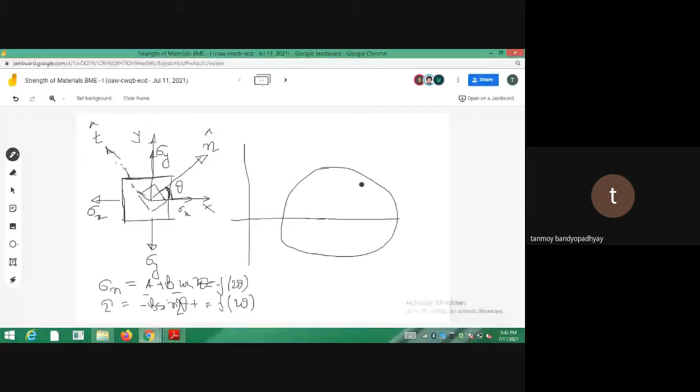So now when I am drawing this, the initial question that you asked is: if I now plot 2 points on this equation of the circle, any point lying on it must satisfy the equation we got, which was sigma n minus sigma average whole square plus tau square equals r square. So this is the equation of the circle.

If you see in the equation of the circle, 2theta terms always appear. So whenever you want to represent something on the Mohr circle, you have to plot the angle as 2theta. The actual inclination with the x-axis is theta, but whenever plotting on the Mohr circle, that will actually be 2theta. So as per your question, these are the 2 points, P1 and P2, and similarly on the vertical line I will be having 2 points.

This is actually, say, suppose Qn, Q1, Q2. So P1, P2 points actually, you can see they are lying on the circle. So only these 2 points carry any sense. No other point on this line actually carries any sense.

So only these 2 points actually satisfy the equation of the circle. So what are these 2 points? On these 2 points, I can see that they are carrying the maximum and minimum normal stresses sigma n. So P1 and P2 will be sigma 1. P1 will be something like sigma 1, 0. P2 will be sigma 2, 0.

So this line is actually representing the principal, the inclination of the principal planes. For this case, when you have considered tau xy equal to 0, you have taken, you are trying to join actually. So what I'm trying to tell is, this x-axis actually represents the plane with

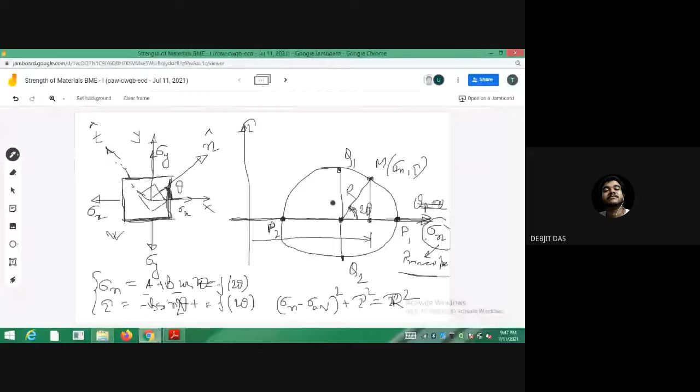So this is sigma average. So sigma average plus r cos, when there is tau, when there exists a shearing stress, that's a different case we'll be discussing today. I am just discussing the case where tau xy is absent. That's a different case that we'll be taking up today.

Yes. Okay, is this clear up to this point?

So let's now move to the next thing. As I mentioned, I think both of you who asked the questions have the same doubt. My explanation is: whenever there are two things, one is the actual inclination of the planes, and number two is the Mohr circle, don't confuse between the two.

I mean, don't take the actual inclination on the Mohr circle, because the Mohr circle is just the equation of a circle. It's a different thing from figure 1. Actually all the angles there are 2 theta, so that is why the Mohr circle always carries values of 2 theta.

And why don't I show this theta plane on the Mohr circle? Because on the Mohr circle, the sigma axis is the theta plane. Okay? On the Mohr circle you don't... the voice is breaking.

So I think you should study the figure in your books and all. So now let me move to the next part to cover.

So now let's consider. So yesterday, have you drawn the Mohr circle? I had given it as an example in the class as well.

Yes, sir. So has the values matched? Almost, sir, almost. I asked you to calculate the percentage error as well. Yes, sir, the second degree we can't... I mean, I can't find it because the graph paper is very small, the boxes are very small, so I can't.

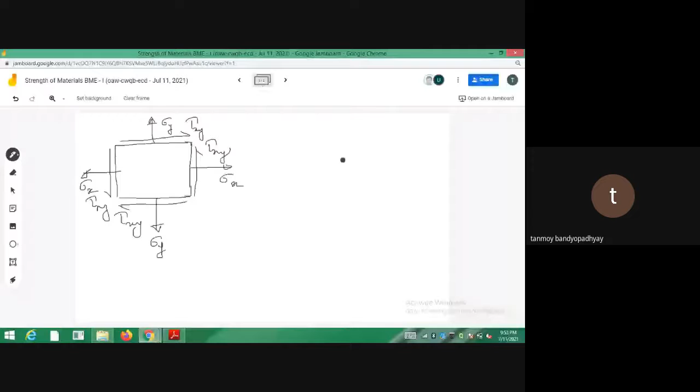Okay, so now how to draw the Mohr circle for this one? In order to draw the Mohr circle, I believe I have discussed this already. Now we have to take some convention. The convention is generally known to us. So we are having two faces. This is the convention actually.

So whenever the convention regarding the normal stress is applied, normal stress that is tensile we take as positive. Whenever it is compressive, we take it as negative. So that is the general convention.

Now regarding the shear stresses, what is the convention we have followed? Whenever about a center point the shear stresses are trying to rotate it in the clockwise direction, take it as positive, meaning plot it above the sigma axis. You can see that for this one, the tau about the center of the body, the shear stress is trying to rotate the element in the clockwise direction, so the point has been plotted above the axis. So clockwise means above, and whenever it's trying to rotate the body in the anti-clockwise direction, the point has to be plotted as negative as per our convention.

We had discussed the conventions regarding shear stresses. So whenever the shear stress is trying to rotate the body in the anti-clockwise direction, always take the point on the bottom side, bottom direction.

So let's see how the things are working for us. I am considering this face. On this face, let me call it A, B, C, D. So I am having two points. On the face AD, you can see that sigma x is actually positive. And what is the shear stress? Shear stress is tau. How is the shear stress trying to rotate this one? This shear stress and this shear stress, they are actually causing an anti-clockwise rotation, so anti-clockwise rotation means I have to take it as minus tau xy.

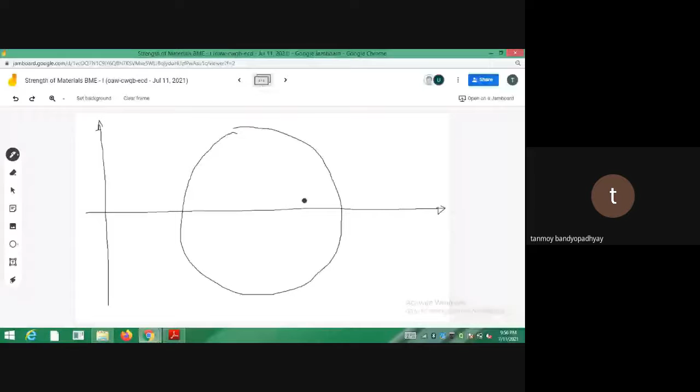So initially, what is the step? Forget the circle. Initially, you have to take 2 axes: one is sigma n and another one is tau n. Then you have to plot the 2 points sigma y and sigma x.

So I am plotting 2 points. This is one point I am plotting, this is the other point I am plotting. So this is sigma x, this is sigma y. Then what you do is you have to bisect these two.

So how to bisect these two? This point is actually sigma x comma 0. So I have given some name. This is sigma y comma 0. Then you bisect the two. So this point will be sigma average comma 0.

Now what you do is, with this as the center and this one as the radius - either this one is the radius or this one is the radius - with any one of them as the radius, you draw the circle. So now this is the point.

On this point, since sigma, the first point is sigma x minus tau xy, just plot it below the sigma n axis. So this is one point which you have to plot, actually sigma x comma minus tau xy.

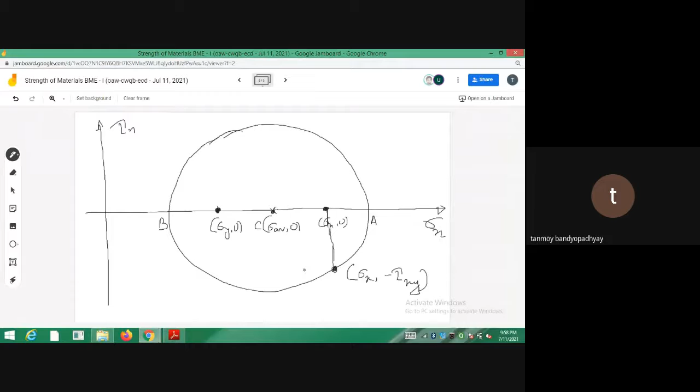Then similarly here also you plot one point. This will be on the other face, it is actually sigma y plus tau xy. Then what you do is you join these two points.

So now this angle is this one. If you can measure this one, this is sigma y, so this one will be as I last discussed. This point will be sigma 1, 0, this point will be sigma 2, 0.

So if you find out, this value will be sigma x minus sigma y by 2. And what is this length? This length is tau xy. This length is tau xy. I call it as theta p. So theta p.

So this angle is actually 2 theta p, as will be clear. This is because tan 2 theta p is equal to 2 tau xy divided by sigma x minus sigma y. So you can see that this is tau xy. So tan 2 theta p will be perpendicular by base - perpendicular length is tau xy divided by this one. So you should be getting this value. Okay, clear?

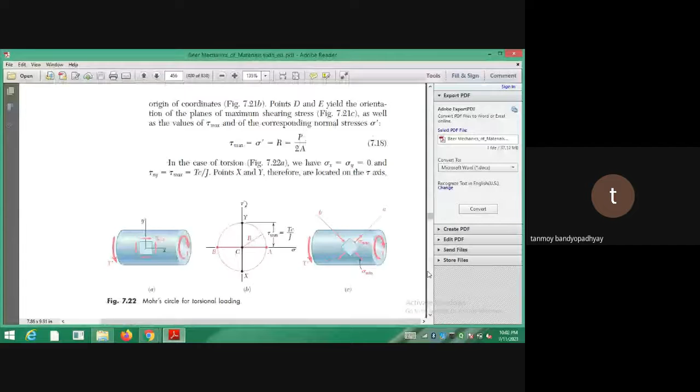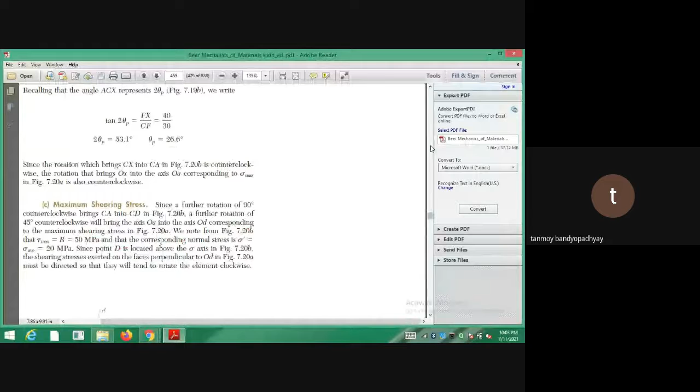Okay, so now you can see in this figure what I have done. This is the Mohr circle. For this case, this is the thing I have drawn.

Now what you have to do in order to arrive at sigma n and tau n is rotate this line xy by 2 theta in the clockwise direction. When you rotate this line, x prime, y prime may fall on any coordinate.

If 2 theta is 180 degrees, then x prime, y prime will actually coincide. Understood?

So whatever is the value of theta, you rotate this line xy by 2 theta, and you will arrive at a new line x prime, y prime. The coordinates of this new line are actually the values of sigma n and tau n. So x prime is sigma n minus tau n, and y prime is sigma n plus tau n. Understood?

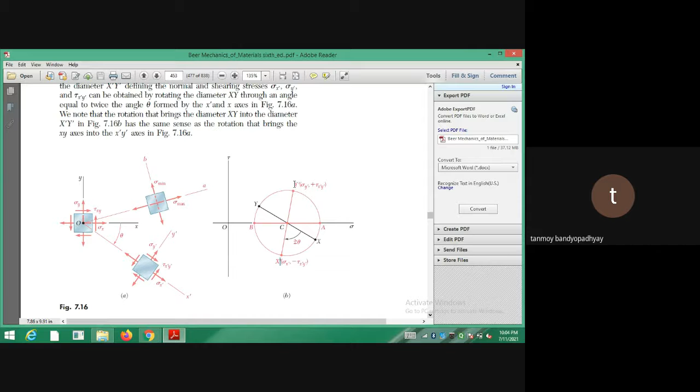So in order to obtain any point on the Mohr circle, this is the actual line xy, and then you have to rotate this xy line by 2 theta. So initially you have to get this xy line.

So this is one problem I will be giving you. On the Mohr circle that you are having, this is sigma n, and this is tau n.

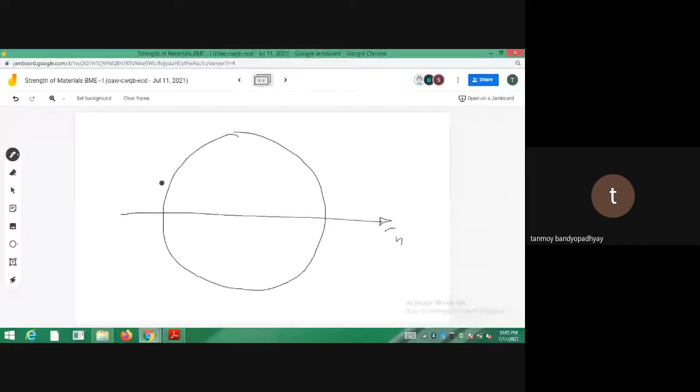So you will be getting some point x, y. I have shown you how to plot those points. So x will be having coordinates of sigma x, minus tau xy.

And this will be point y, with coordinates sigma y plus tau xy. Then this angle is actually 2 theta p.

Then whatever is the value of rotation given, suppose you are given say 30 degrees, so 2 theta is equal to 60 degrees. So you rotate this line by 60 degrees, and you'll be getting some new point.

This point will be x prime and this point will be y prime. Whatever are the coordinates of these points, these will actually be the values of sigma n and tau n. These are two complementary points separated by 180 degrees. In this way, you have to draw the Mohr circle.

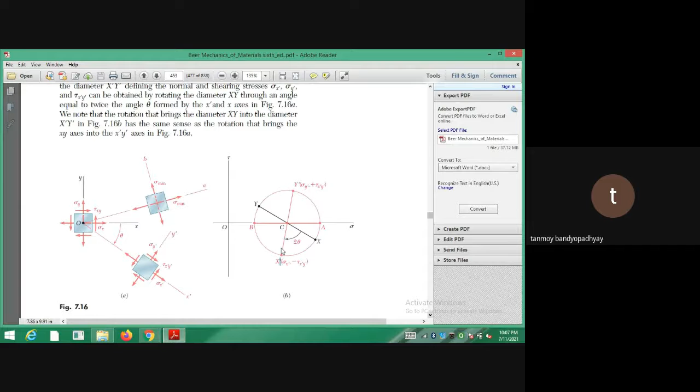So the thing you have to study is - this is given, there's a lot written here. So initially you have to find out how to plot the points x and y. The xy line is the actual line that represents the principal plane now. In the previous case, it was like AB itself, because in that case you don't have tau-xy. So AB was your principal plane line.

So from there you plotted 2 theta. But now the case has changed. In this case, not AB, but the line xy shown in the figure represents the principal plane line. So from xy, you have to draw 2 theta, so as to arrive at the new value of the stresses, sigma-n and tau. Do you understand the difference from the previous case? In the previous case, the x-axis itself was your principal plane line. But now the principal plane line has changed.

I hope I have kept the figure. Oh yes, I have kept the figure. So as I told you, for the previous case when tau-xy was absent, this x-axis itself was your theta-p line, your theta-p plane. So from the theta-p plane, you rotated it by 2 theta.

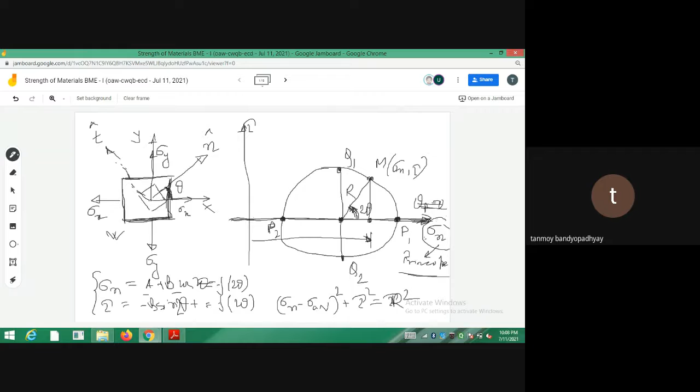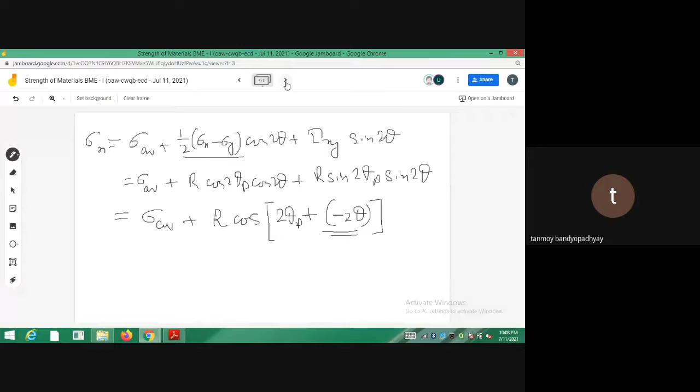Now your theta-p plane has changed, it has changed to this one. So now your theta-p plane has become this xy line. So from this xy line, you have to rotate it by 2 theta clockwise. Okay, I am writing it as clockwise. So this is very important.

Don't rotate it anti-clockwise as per convention. As per our conventions, you have to rotate it in the clockwise direction, so that this x-prime y-prime line is now the new line that represents the value of the stresses.

Can you follow up to this? Yes sir, understand - not understand, understood. Yes sir.

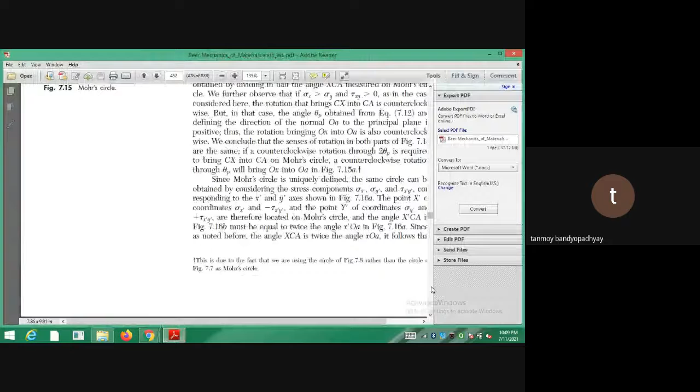Okay, I am giving you a problem to do as Mohr circle. Last day I gave you one problem, so I'm giving you a problem from the book itself, a solved problem, okay? But don't do it by this method - for construction of the Mohr circle, I'm going to do it by this method itself, sorry.

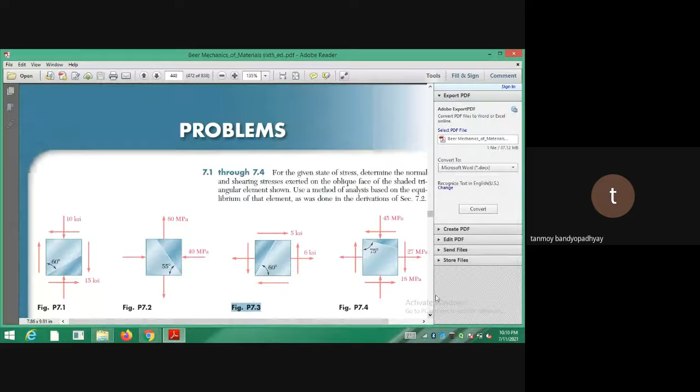It's self-explanatory. So whatever value you get from the analytical method, if it matches with the Mohr circle method, you can be rest assured that you have done the problem correctly.

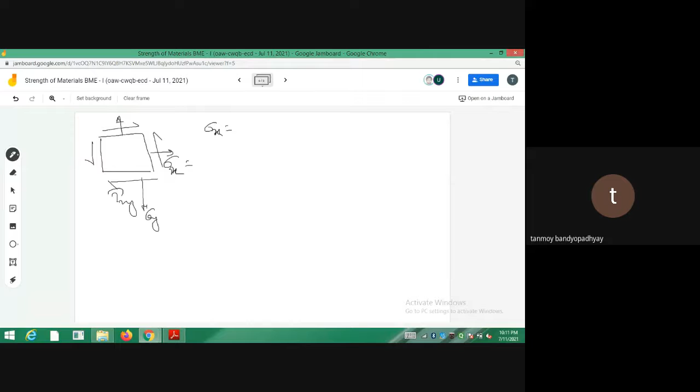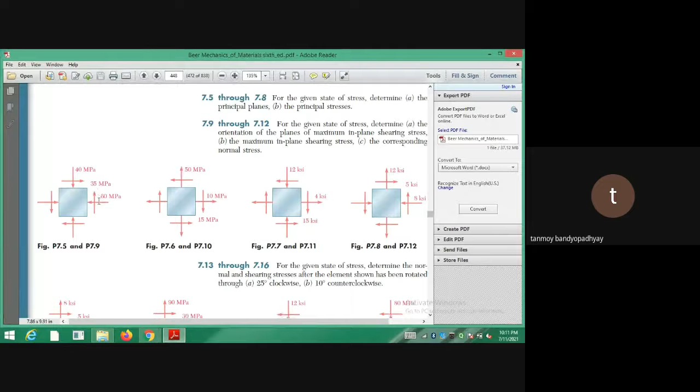সো ইনিশিয়ালি কি করতে হবে? এখানে তুমি ডাইরেক্ট প্লট করে নাও। ইউ টেক হোয়াট এভার ইজ গিভেন, ইউ প্লট দি ভ্যালুস। সো সিগমা ওয়াইটা নেগেটিভ অ্যাক্সিসে চলে যাবে। সো ইট উইল বি লাইক দিস - সিগমা এক্স দুটোই নেগেটিভ অ্যাক্সিসে চলে গেছে, এইদিকে y axis টা চলে যাবে, সো ইটস ইন দ্য সেকেন্ড কোয়াড্রান্ট।

সো ইউ প্লট সিগমা x is I think -60, 0, and then you plot one point which is -40, 0. So you are getting the 2 points. Now you bisect those 2 points, ঠিক আছে? You bisect those 2 points, so you will be getting sigma average, 0.

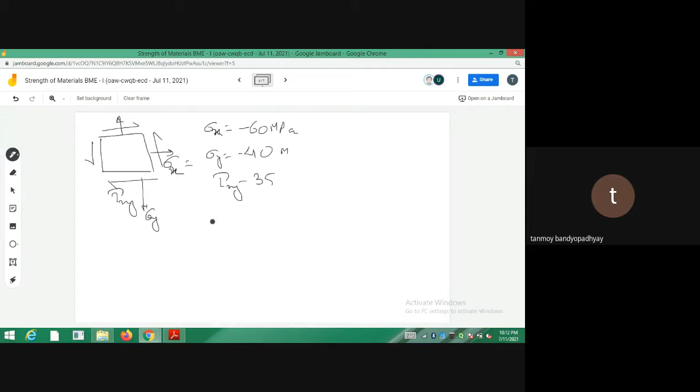Now what you do is, so what are the points that you are having actually? So initially you are having, so for a plane, for this face it is -60, tau xy, এই ফেসের জন্য it is counterclockwise, তাই তো? So negative, so -35 for one face, and for the other face it is -40, +35.

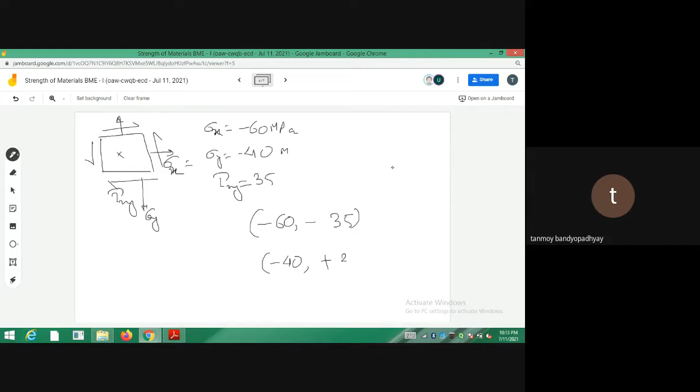So minus 60 minus 35. So minus 60 minus 35 will be 1 point you get. So this is minus 35. You come down by minus 35, and again you go up by plus 35. Then you join these points.

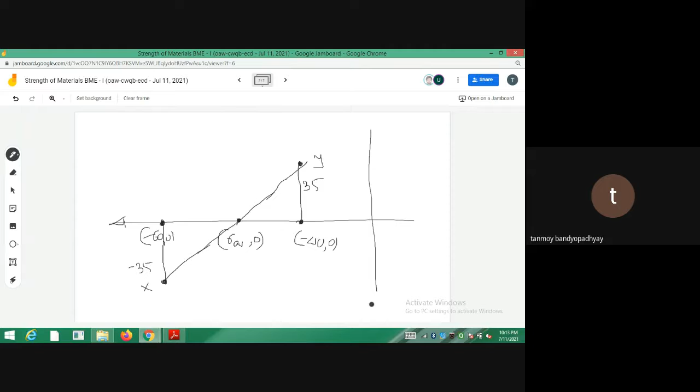Okay? So these 2 points are actually points on the circle. One is x, other is y. So take this one as radius, you complete the circle. So you'll be getting a circle sort of this thing. So circle diagram hobe, sorry for not drawing well, about to draw a circle.

Now তোমাকে কি বলেছে? আচ্ছা এবার এখানে প্লেনটা কিছু বলেছে, দেখে নিচ্ছি দাঁড়াও, 7.5। আচ্ছা यहाँ पे তোমাদের প্লেনটা বলেনি, you can take any plane. Say you take theta is equal to 30 degree, say you are supposed to find out what is theta is equal to 30 degree.

ঠিক আছে? It's easy, মানে it's beneficial because you can just match the values with the analytical answers. So not needed, the answers are not needed. So what you do is now, theta is equal to 30 degree means 2 theta is equal to 60 degree.

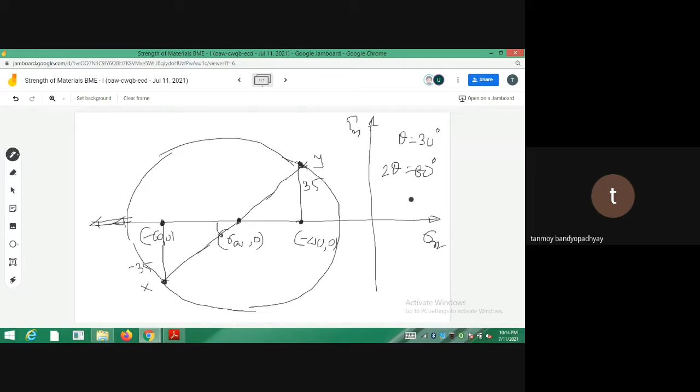So this line now you rotate clockwise, right? So this one is 2 theta p, ঠিক আছে? এইটা ছিল হচ্ছে 2 theta p. So now you rotate this by কতটা rotate করতে হবে? 60 degree, so you rotate it by 60 degree. So you'll be getting a line something like this.

So this one is the line. So this is the new line x prime, this is the new line y prime. So for x prime, just to check, this is sigma n, comma tau n. Tau n টা positive হয়ে গেছে। So now you find out what are the coordinates of this one.

So you'll be getting some value of sigma n, you'll be getting some value of tau n from the actual graph. So this is from Mohr's circle. Then you do the analytical method and find out what is sigma n and tau n. So if those two values match, you will be getting the answer.

বোঝা গেছে? এখানে অ্যাকচুয়ালি দুটোই কম্প্রেসিভ আছে বলে আই থিঙ্ক ইটস ডিফিকাল্ট, ইউ ক্যান ট্রাই দিস ওয়ান অলসো। যদি মনে হয় এটা একটু কমপ্লেক্স আছে, ইউ ক্যান ট্রাই দিস ওয়ান অলসো। হিয়ার ইউ আর হ্যাভিং লাইক দিস ওয়ান পজিটিভ। Both of them, anyone, 7.5, 7.6, anyone you can try. If you want to keep sigma x, sigma y positive, you can try 7.6, and you can try 7.5, anyone. ঠিক আছে? 7.5 এ both sigma x, sigma y are negative, so orientations একটু different হচ্ছে। ঠিক আছে? Clear?

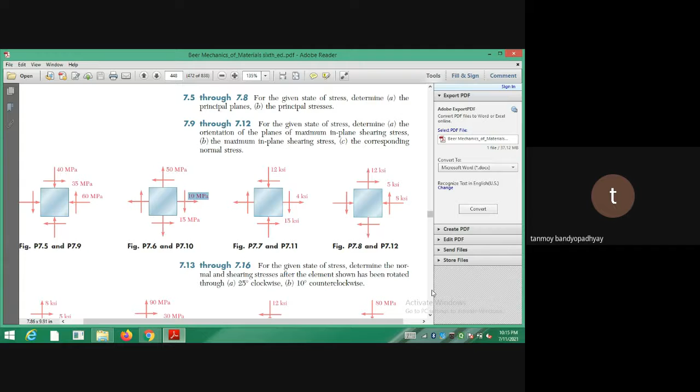Whenever we look at this, it's given in the book also, we have studied this. This is related to our sign convention. Whenever the shear stresses are clockwise on any face, we take it as positive.

So this is sigma x, this is sigma x. Suppose this is anti-clockwise, sorry, so this one is anti-clockwise. This is the center of any element I am referring to.

So sigma x, you can see that tau xy is causing, on the faces that carry sigma x, tau xy is carrying an anti-clockwise moment. That is why it should be sigma x minus tau xy.

And if I consider the other face carrying sigma y, on the sigma y face, this tau xy is having a clockwise moment. So for the sigma y face, you have to plot it taking sigma y plus tau xy. Did you understand?

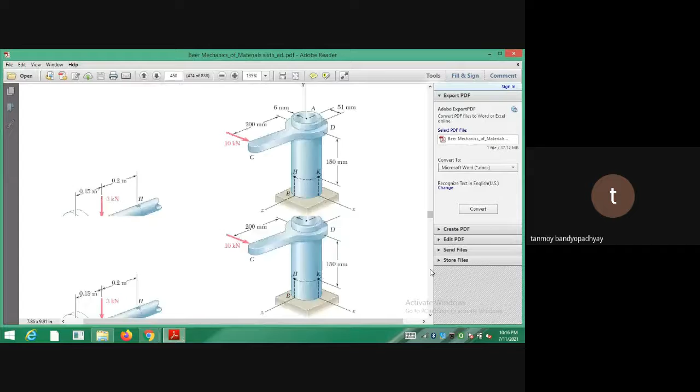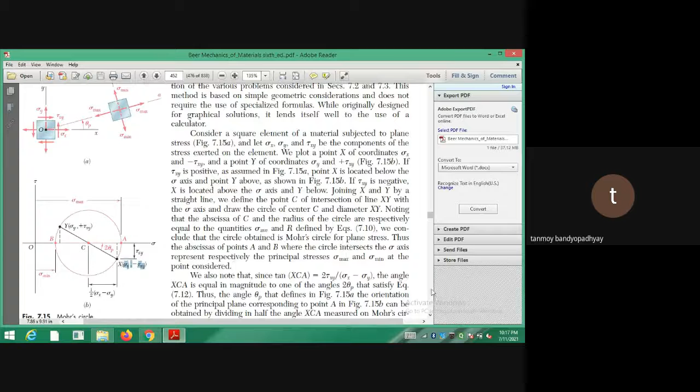This sign convention is given here in the book of Beer Johnston. You can follow it at home. If you feel unsure about the sign convention, study this section, why they have taken sigma x minus tau xy and sigma y plus tau xy.

So just study this convention given on page 452, and you'll understand it. If clockwise, you have to take the point above the sigma axis, and when the shear stress moment is anti-clockwise, you have to take it below the sigma axis. That's it.

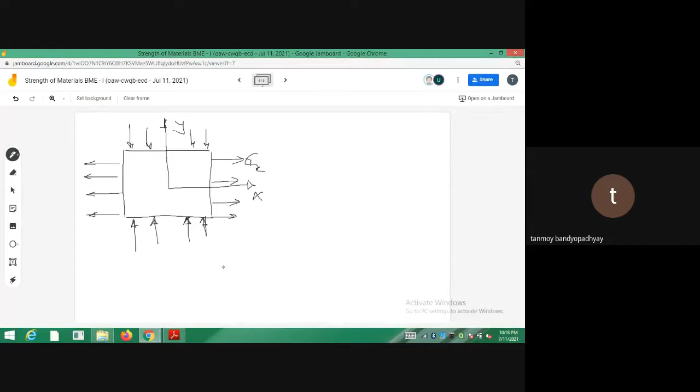Okay sir. So this is sigma x, this is sigma y. It is a particular case of the biaxial stress system, where you are having sigma x equal to minus sigma y. So what is the center of the Mohr circle?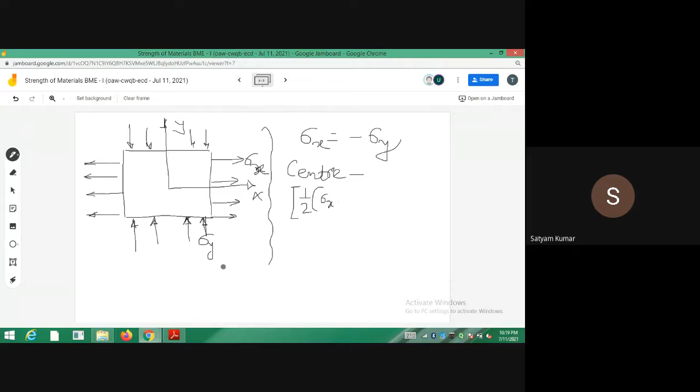As per the discussions, this actually helps you understand Mohr's circle, so I generally do it just before or after that itself. So what is the center of the Mohr circle? You put the values here, and the center of the Mohr circle is the origin.

What is the radius of the Mohr circle? The radius of the Mohr circle will be equal to tau max, if I call it that. That is equal to half of sigma x minus sigma y. Either way you put the values, tau max will be equal to plus minus sigma x.

So if we now plot the Mohr circle, what we should get is this is the sigma n line and this is the tau line. The origin, it is a circle with center lying at the origin itself. This is the Mohr circle for the pure shear case.

This is the origin of the Mohr circle, that is 0,0, and this one is sigma x, this one is sigma y, which is equal to minus sigma x. So you get the two faces, right? On one face the normal stress is represented by sigma x, and this is sigma y on the y face.

And the shear stress, the maximum value of the shear stress is equal to plus minus sigma x or sigma y. This is the value of tau max, the extreme point on the tau axis, so this is the tau max line. Let me call it A point, B point, this is the center of the Mohr circle, this is F point, and this is F prime point. Is the Mohr circle clear now?

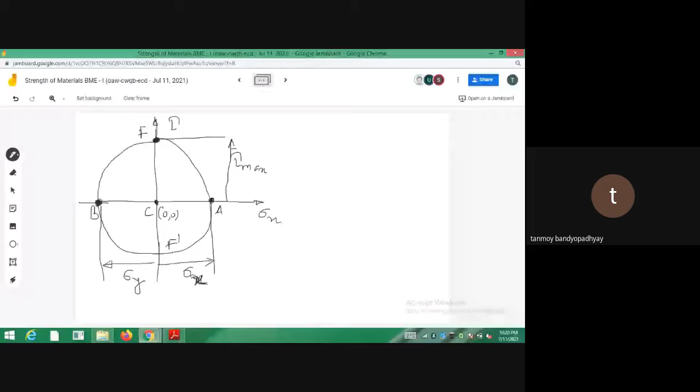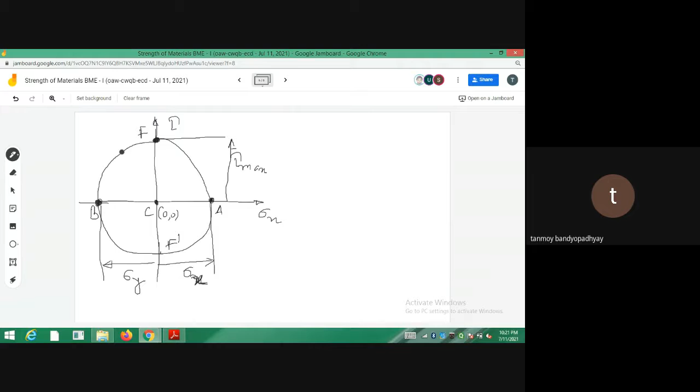So the normal stress actually vanishes at these two points, F and F prime, on the tau axis where the normal stress is actually zero. So where the normal stress will be zero, if I put 2 theta equal to 90 degrees, theta is equal to 45 degrees. So this is the case of a biaxial stress where at any 45 degree plane you are actually having a maximum shear plane, or the normal stress actually vanishes.

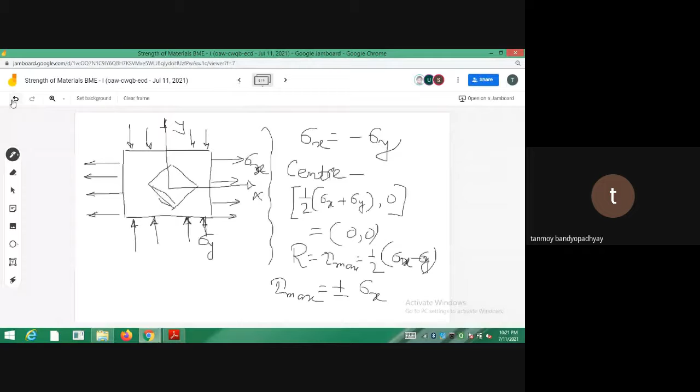So if I now draw a 45 degree plane on this stressed element, the shear stress is maximum. So I am taking a plane that is at 45 degrees, whose inclination is 45 degrees with the x axis, okay?

So this element will be in a state of pure shear, because it is a maximum shear plane, the normal stresses are zero, so it will only be carrying shear stresses, correct? This is actually a point represented by F and F prime. At the point F and F prime you are actually having tau equal to maximum, so you are having only the tau value, but the normal stresses are actually zero. Sigma n is actually zero, because F and F prime don't carry any normal stresses, they only carry shear stresses.

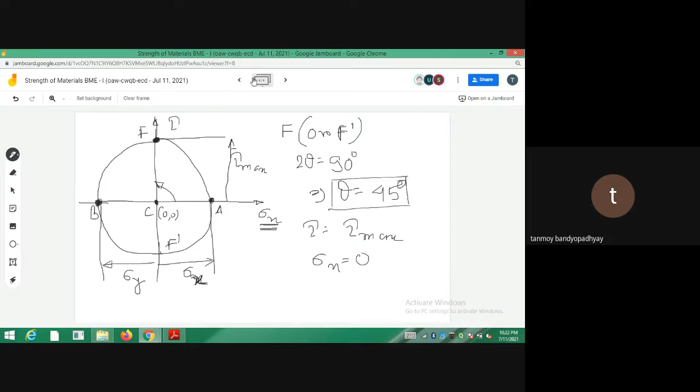So any element that has an inclination of 45 degrees with the x axis will be in a state of pure shear. Let me call it tau, tau, tau, tau.

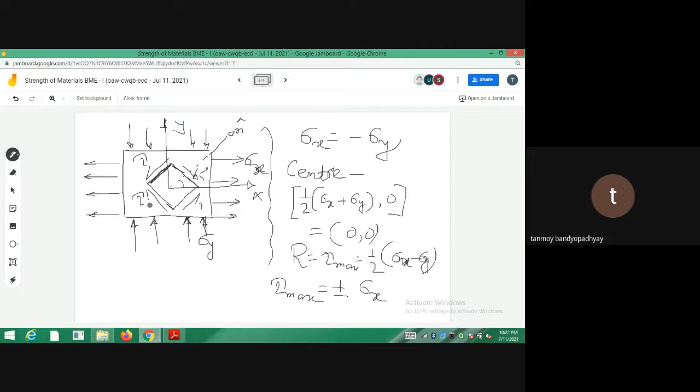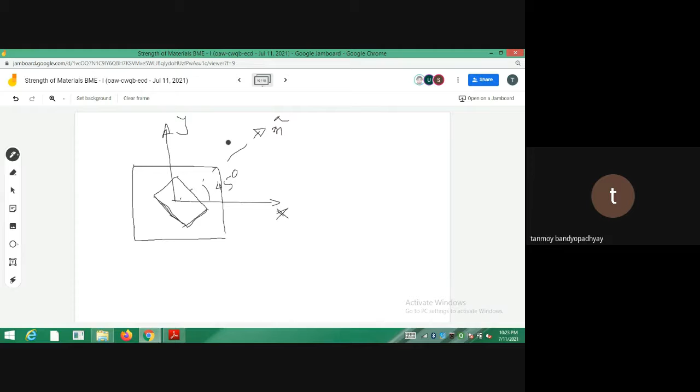So I'm drawing the element here to make it clear. I am having a biaxial stress element. The coordinates are, this is x, this is y. So any element whose inclination is 45 degrees, this is the n cap line. I am taking one element shown by these lines which is at 45 degree inclination. This element will be carrying only shear stresses, not any normal stresses, because this plane is represented by the points F and F prime in the Mohr's circle.

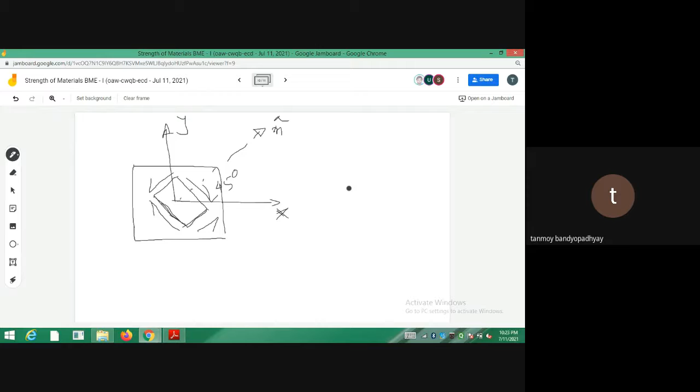Now if I draw this stressed element, let's see how the stress is actually causing deformation in this element. So I'm drawing that stressed element only, nothing else.

So here, since it is under pure shear, it has no normal stresses. What is the function of shear stress? The function of shear stress is only to cause angular displacement.

So whenever I am having an element like this, suppose it is fixed at this end, and I am only giving it shear, it will only deform angularly. This is the final position. So only some angular deformation will be caused in the element.

But whenever I have an element like this and I apply a normal stress, this normal stress will cause a change in the length, an elongation. So a shear stress will only cause an angular displacement, but a normal stress will cause a change in the length.

So if I consider this element, how does it actually get deformed? Suppose this was A, this was B, this was C, this was D. If it gets deformed, C will come down to a point C prime. This point B will go to one side, reaching a point B prime. D will come here, reaching a point D prime. A will also move, becoming A prime. So this is the final shape that the body is supposed to assume.

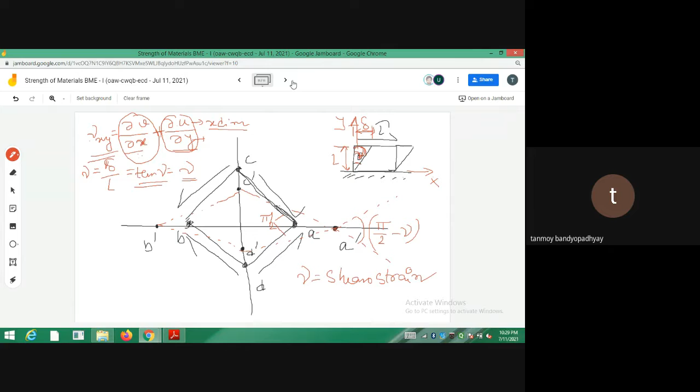So if I now write the expressions - what will be epsilon x? Do you all know Hooke's law?